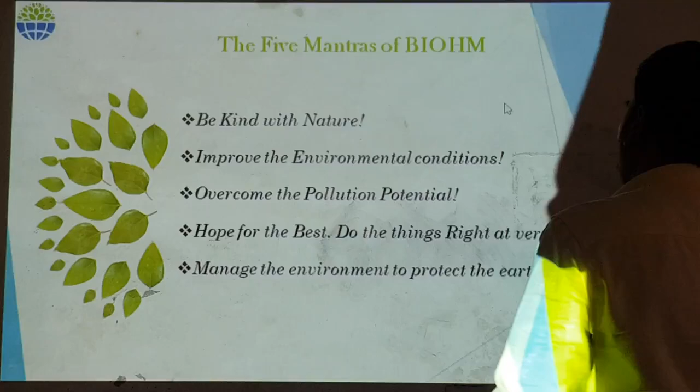So I am from Biohm Consultare, Managing Director of this company. We have started recently. Before that, I was working for another company.

Our 5 mantras of BIOHM have 5 letters. BIOHM is: Be kind with nature, Improve the environmental condition, Overcome the pollution potential, hope for the best and do the things at the very first time, and manage the environment to protect the earth. These are the 5 mantras, and that's the thought process going forward.

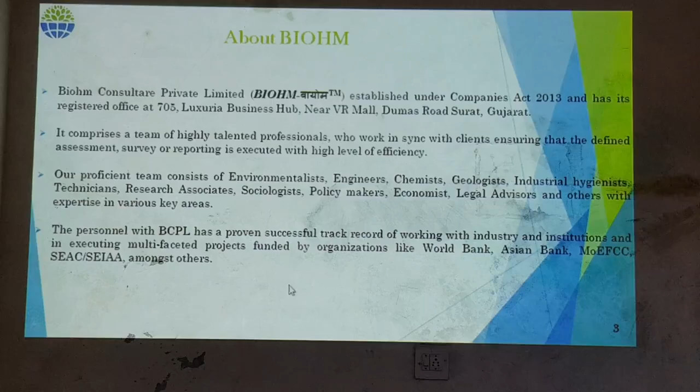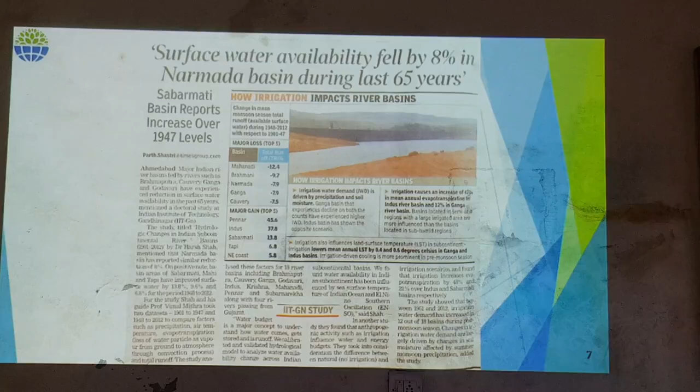Now the exact scenario that is advancing - how did this term come about? Why are we talking about water? We are concerned about the water. Reason: you can see this very recent article published in the Times of India.

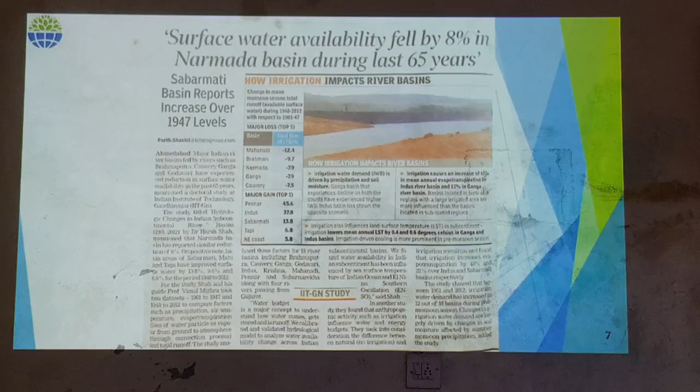Surface water availability fell by 8%. You can assume what 8% means, because that's across the whole Narmada basin during the last 65 years. That means day by day water is depleting. Why? Because this is a natural resource and we are consuming it, and not just consuming - we are polluting it, which cannot be returned again to that river or those rivers.

So in the current scenario, water is so important because we are living entities, and any living entity cannot be sustained without water, without a single drop of water.

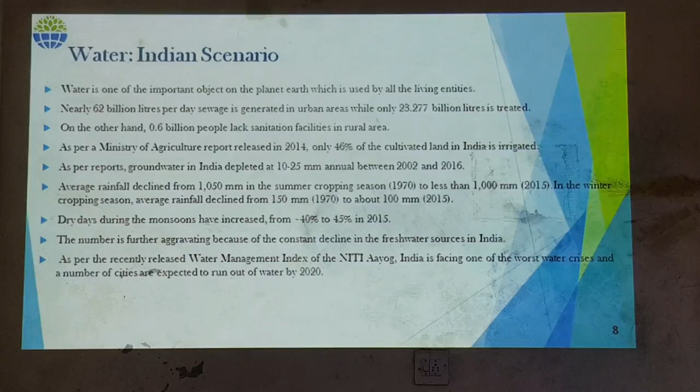You can assume all industry, even fabrication or manufacturing industry, uses water as a main prime source. In chemical manufacturing industry, they use huge amounts of water, and distillery industry is also an intensive water use industry.

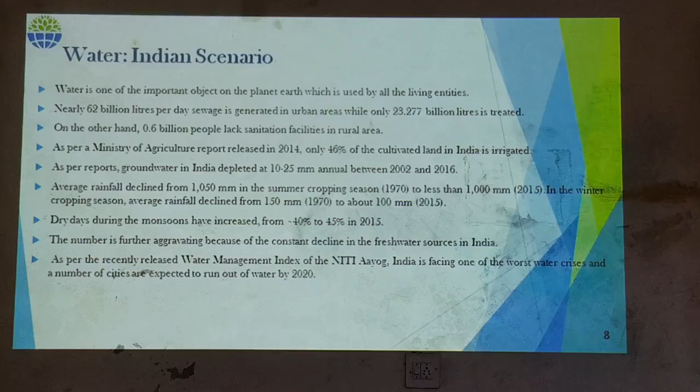So in the current scenario, nearly 62 billion liters of sewage is generated per day in India. This figure is for this whole country, and only about 23 billion liters will be treated. That means not less than 50% - we are polluting more than 50-60% of water, and that cannot be returned back.

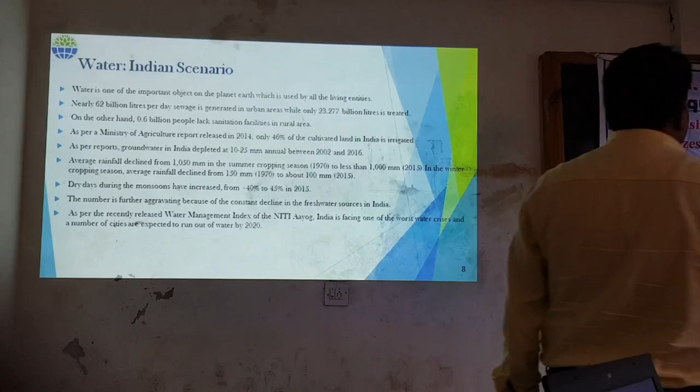Over 0.6 billion people in India lack sanitation facilities. Now Swachh Bharat toilets have been prepared and all, but till now this is the actual scenario. If you go to villages you'll see people are not using them. Even if a toilet has been built somewhere, they are not using it.

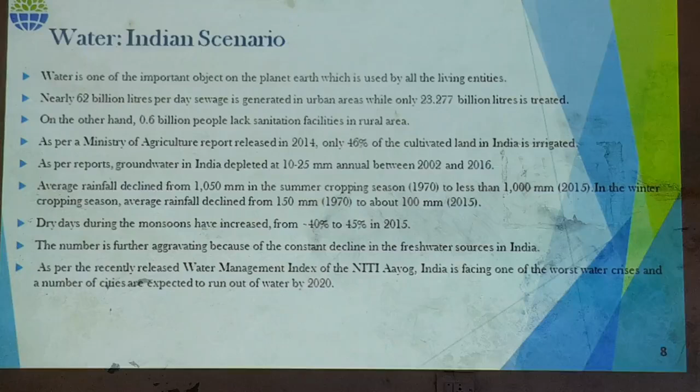As per the report, groundwater in India is depleting about 10 to 25 millimeters annually. In rainwater, in summer cropping season, it's about 1050 to 1000 mm only, and in winter the decline is from 150 to 100, meaning about 50 millimeters of rainfall has been depleted. Any rainfall that becomes a more natural resource is being utilized but not returned back.

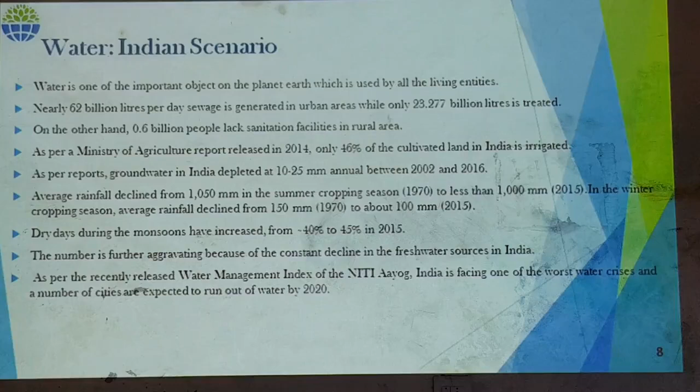So this water is polluting day by day, and the concentration - meaning the amount of water pollution - is increasing day by day. As per the recently released Water Management Index by NITI Aayog, which you can see on their website, there is a water crisis, and more cities like Delhi and others could run into crisis by 2020, which is next year only.

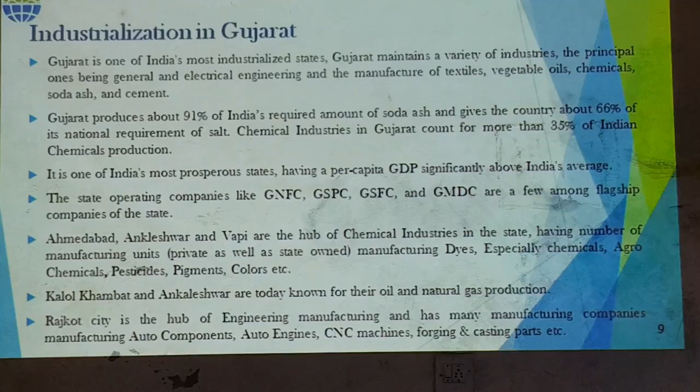That is the current scenario of water. You can assume, if suppose for one day - like you people fast, do fasting - on that day also we take water in the evening and night.

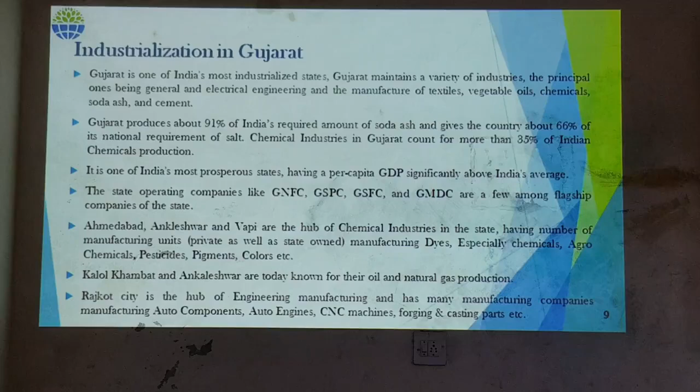Suppose for 24 hours we don't take water, what will we feel exactly? What will happen to us? Then you can imagine exactly how it is for that living entity living in the Rann of Kutch area, where rainfall doesn't even happen, and in the desert area.

So yes, industrialization of Gujarat - you can see in Ankleshwar also, a number of industries are there, and the Ankleshwar city is under critically polluted area.

Again, the CEPI index is more than 70. What is the safety index? Anyone can say about safety? CEPI - this is the pollution index released by CPCB, Central Pollution Control Board.

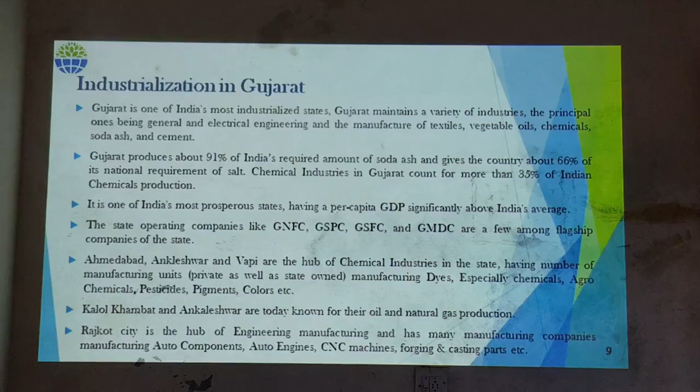Yes, New Delhi. That yearly CEPI index has been released on the basis of air only. From this year, they have included water and land pollution also.

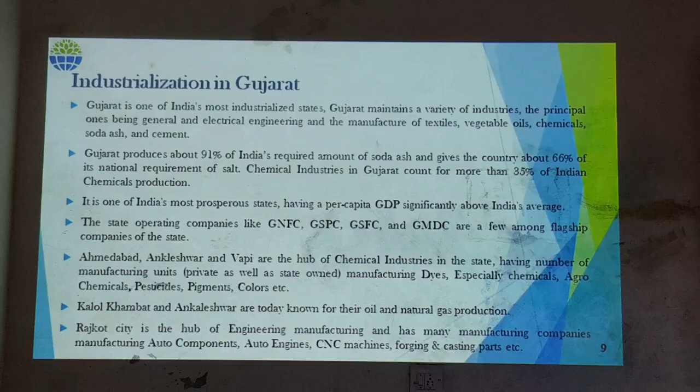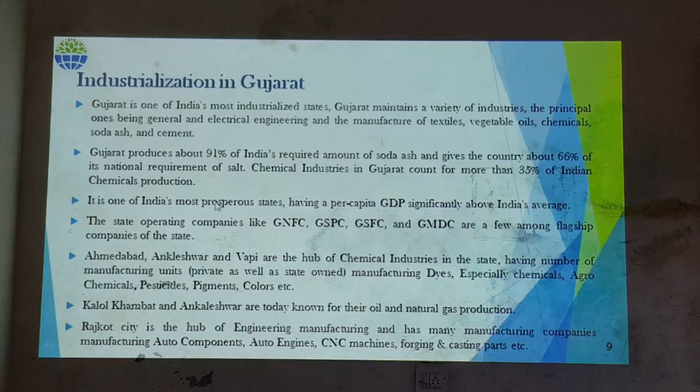So Surat has been rated more than 70, that is a critically polluted area. And now NGT has imposed a condition for 3 months - all industries should be shut down, and no new industry is to be released from the GPCB.

Status of CETP - why CETP? Because ETP is the individual treatment plant, CETP is common. In this area, Ankleshwar GIDC, and any GIDC, has a CETP - common effluent treatment plant. This common effluent treatment plant is designed for a special type, like chemical - designed only for chemical industries. So this is the scenario.

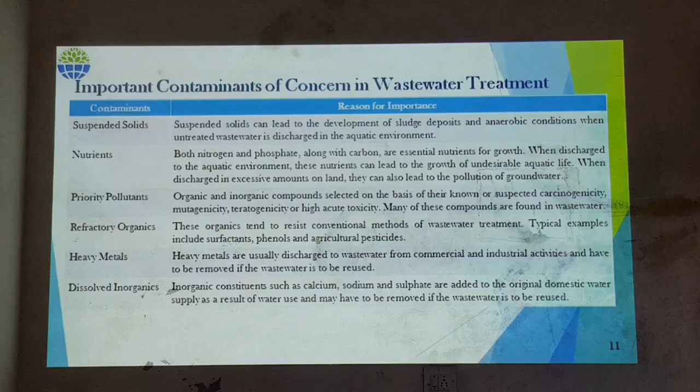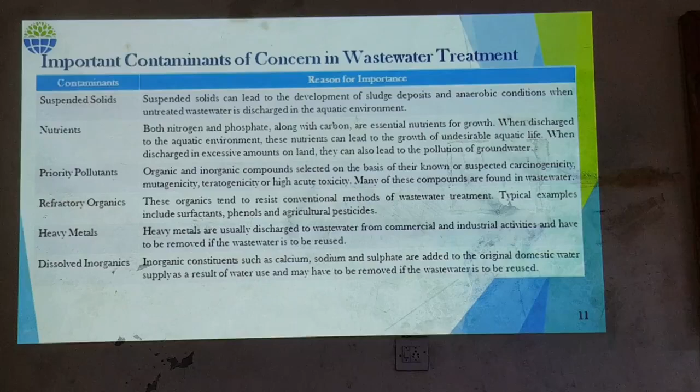So what is water pollution exactly? A simple definition is any undesirable changes in water quality. But there are some contaminants: suspended solids like TSS, some nutrients like phosphorus and nitrogen, priority pollutants, refractory organics like COD and BOD, heavy metals like chromium 6 and chromium 3 - hexavalent chromium is more dangerous - and some dissolved inorganics.

These priority pollutants include heavy metals like arsenic, which is more dangerous when found in drinking water. A case study from West Bengal: the wells there have arsenic, and people used to drink this contaminated water. Under heavy metals we have chromium, cadmium, lead, mercury, zinc and many more. Arsenic and hexavalent chromium are also toxic. So if these heavy metals are found in water, that means there is a danger for drinking.

Pesticide - we are using pesticides in agricultural crops, and these cannot be degraded. They can enter into the groundwater and contaminate it. There are also polyaromatic hydrocarbons, and PCBs.

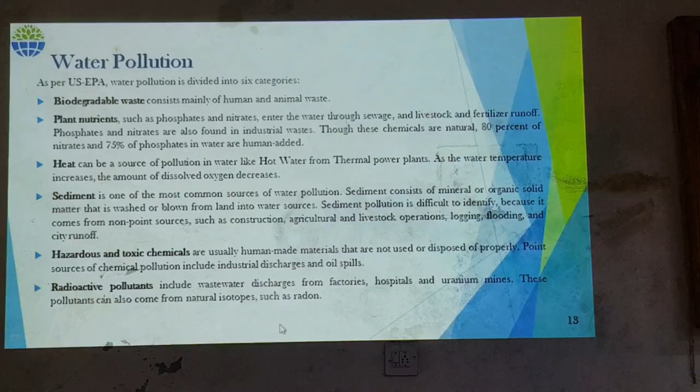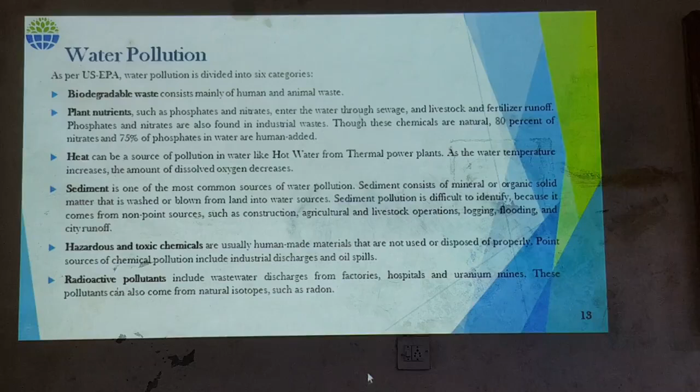As per the definition of USEPA, there are 6 attributes of water pollution. In short: biodegradable waste, plant nutrients, and one factor is heat. In case of thermal power plants, huge amounts of hot water are released into the sea or into cooling systems, and hot water means the temperature is more than ambient temperature, which can degrade the flora and fauna in that water. Other attributes are sediment, hazardous and toxic chemicals, and radioactive wastewater discharge from factories, hospitals, or uranium mines, which can also be dangerous for drinking water.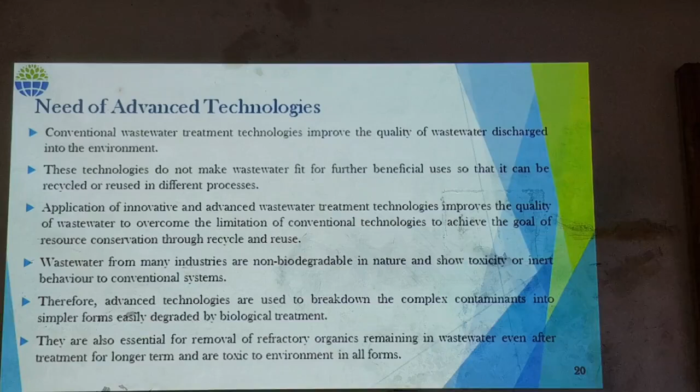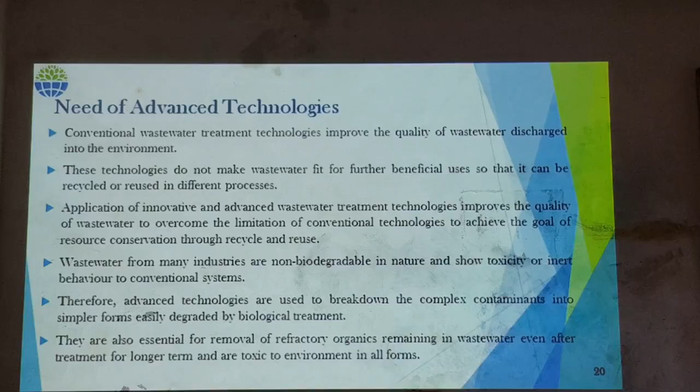Now what is the need of advanced technology? Coming to our topic of advances - for conventional technologies, we feel the operation cost is higher at site, and the quality of treated wastewater cannot be reused in many cases. In case of SBR and even MBR, these technologies do not make wastewater fit for drinking, but the treated water from conventional technology can be used in gardening or cooling towers in industries, since it still has some pollutants.

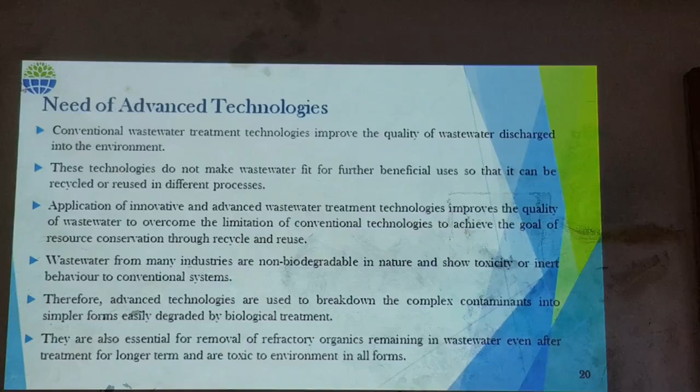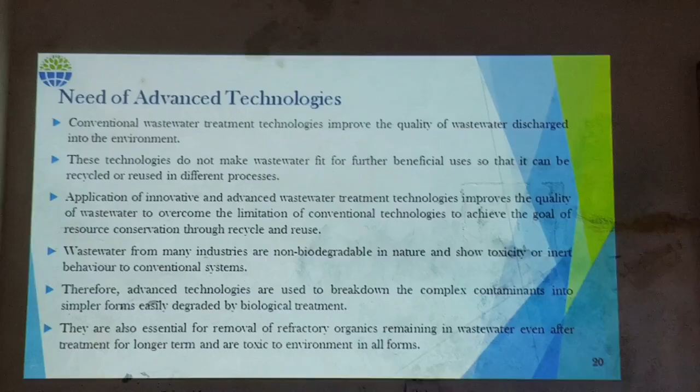So now there's a requirement for the application of innovative and cost reduction technology. Conventional technology's first drawback is that it requires a huge amount of land. Now you can see in any city, traffic is the main problem - why? Because any building does not have adequate parking inside it, since there is no land available. That means land is most important. Again, STP or any type of treatment equipment is non-productive for the industrialist.

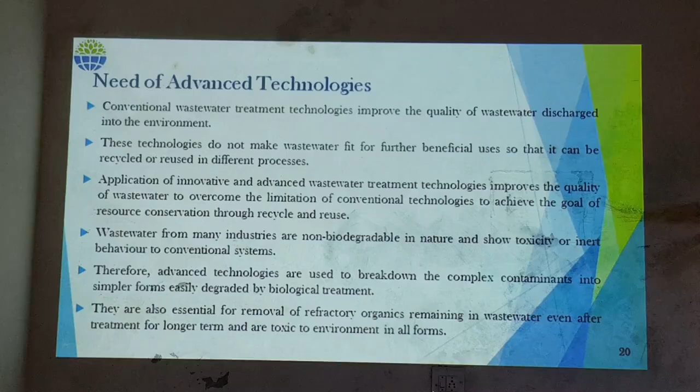Why is it non-productive? Because they don't get any money from it. Productive means any type of manufacturing or activity which generates money, but ETP doesn't give them money - that's the reason. And secondly, it consumes a lot of land, meaning conventional technology requires huge land, and land is not available for this type of setup.

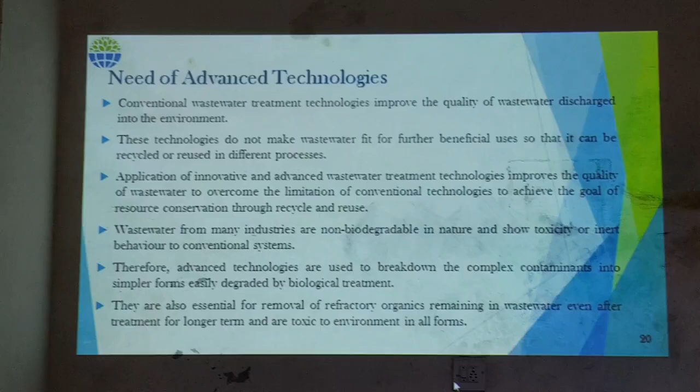So there are two major factors. One is the treated water quality is not good as per CPCB standards, and second is that they require huge land. Other advanced technologies are used to break down complex contaminants like aromatic or cyclic compounds which cannot be treated by conventional technology. So we need these advanced technologies.

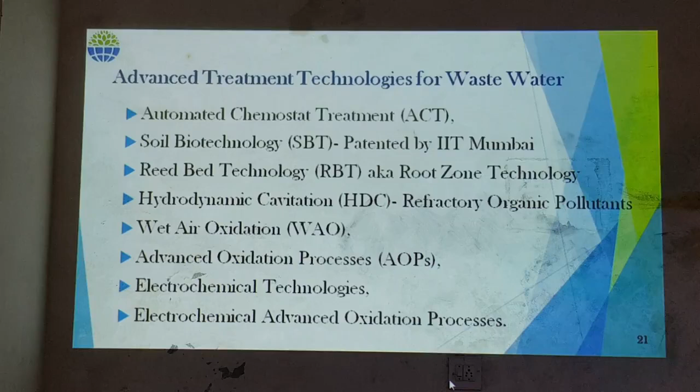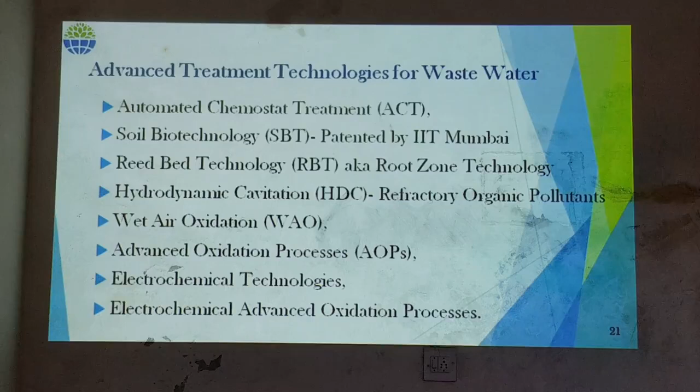So what type of technologies are there in the market? One is automated chemostat treatment, which we'll discuss later. Another is soil biotechnology, especially for STPs, sewage treatment plants, patented by IIT Bombay. Another is reed bed technology, also known as root zone technology, in which we use common reed plants, that is wetland plants, especially typha and some others. Hydrodynamic cavitation, especially for refractory organic pollutants, and wet air oxidation. Some advanced oxidation processes are there too, electrochemical technologies and electrochemical advanced oxidation process.

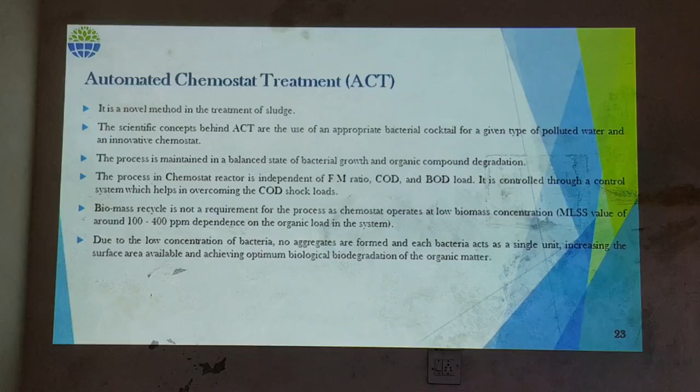Now we will discuss in detail the automated chemostat treatment technology. What is this? This is a novel technology, especially for treatment of sludge. Sludge, after treatment from any ETP or STP, we have sludge, that is semi-liquid, having more than 90% moisture and some content of organic and inorganic matter, like whatever you have treated in terms of BOD and COD, suspended solids, they can be in sludge.

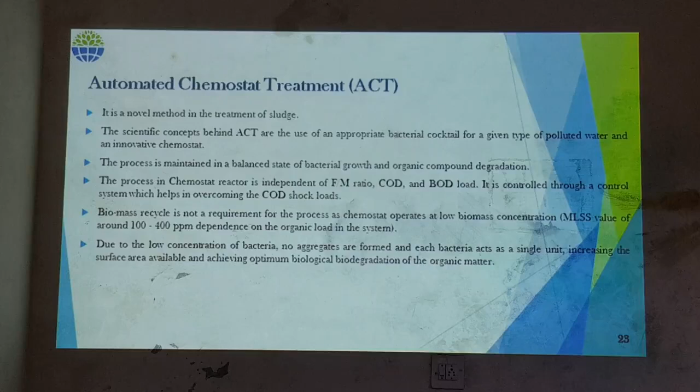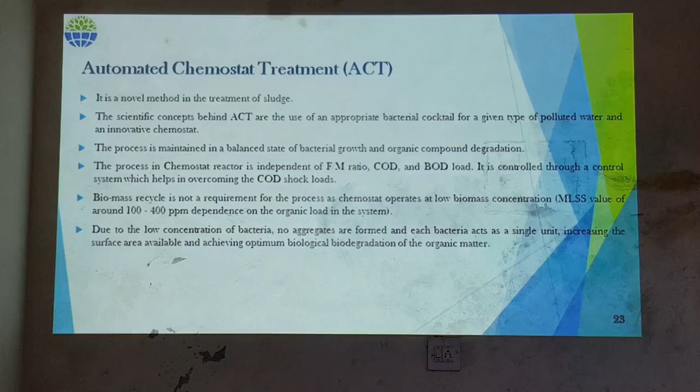So the scientific concept behind this ACT, automated chemostat treatment technology, is the use of an appropriate bacterial cocktail, because we need to treat the sludge, and sludge has organic and inorganic content, inorganic in terms of heavy metals. So we need an appropriate bacterial strain to degrade it into simpler compounds. That is known as the chemostat process. You may have studied this in some syllabus, chemostat in chemical engineering.

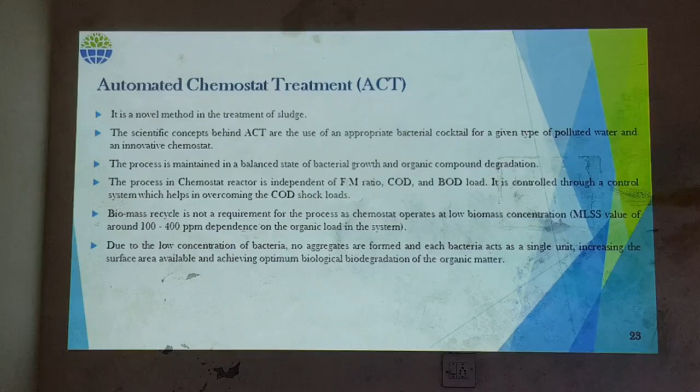The process is maintained in a balanced state of bacterial growth. When we introduce bacteria into any type of media, they have to grow and multiply within 24 hours, doubling. Any bacteria, E. coli or something, they will have fast reproduction within 24 hours, and they have a progressive logarithmic phase.

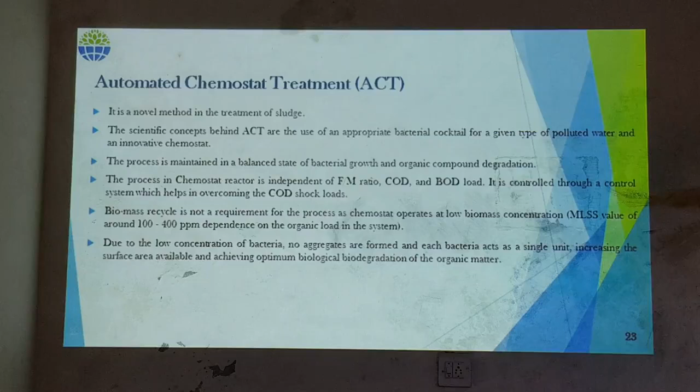The process in the chemostat reactor is independent of the F/M ratio, COD and BOD load also, and this can be controlled through an automated control system, which helps in overcoming COD shocks, because COD controls the system, so we have to control before COD shocks occur. Biomass recycle is not required for this chemostat process, because it operates at low biomass concentration, that is MLSS, which is around 100 to 400 ppm, depending on the organic load of the sludge.

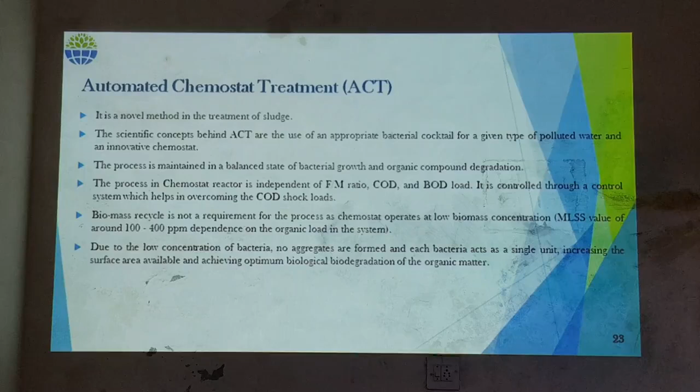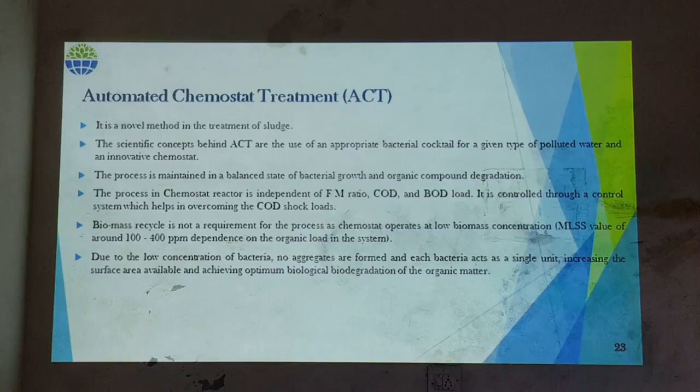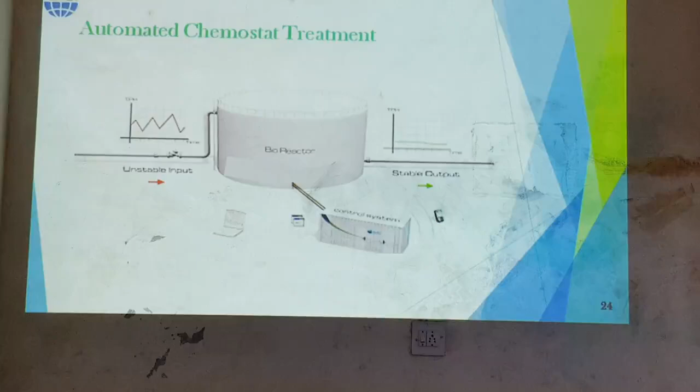The input, after ETP or STP, that is sludge, goes into the bioreactor, and the bioreactor has a specific bacterial strain designed for degradation of that specific type of sludge. Why? Because we need to degrade those compounds. So before filling the sludge into the bioreactor, we characterize the sludge, how much inorganic, how much organic, and which type of organic matter is inside the sludge. As per that characteristic, we have to choose the bacterial strain, not design it exactly, because in the market the bacterial strains are already available based on characteristics. So we choose the bacterial strain and then maintain the chemostat process.

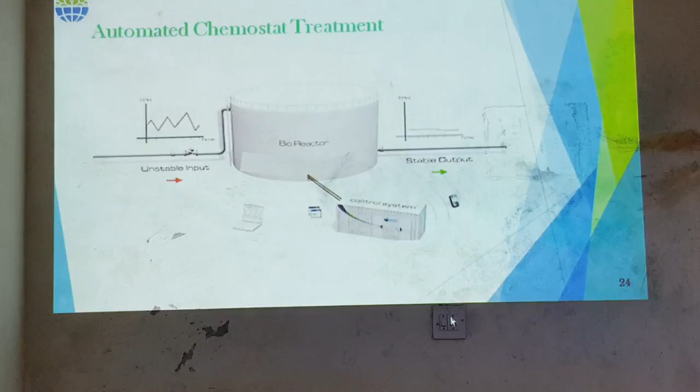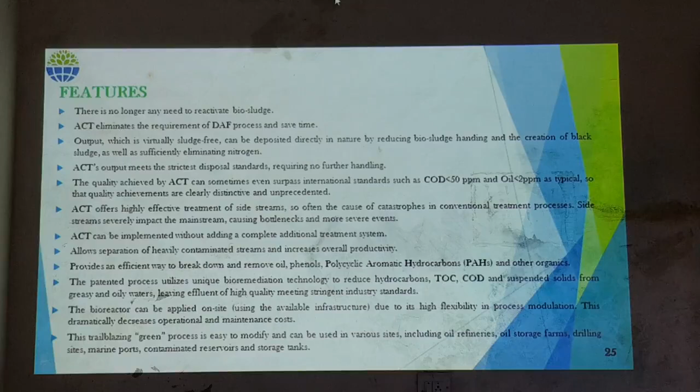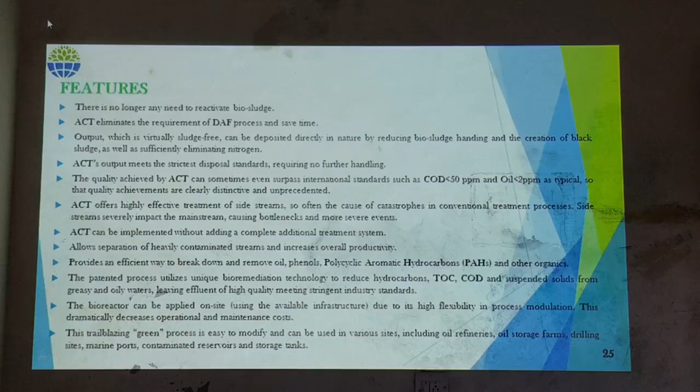The output sludge can be deposited directly in nature by reducing biosludge handling and creation of black sludge. This technology's output meets the standards of CPCB, GPCB and even WHO. And this offers highly effective treatment of side streams, also implemented without adding additional treatment technology.

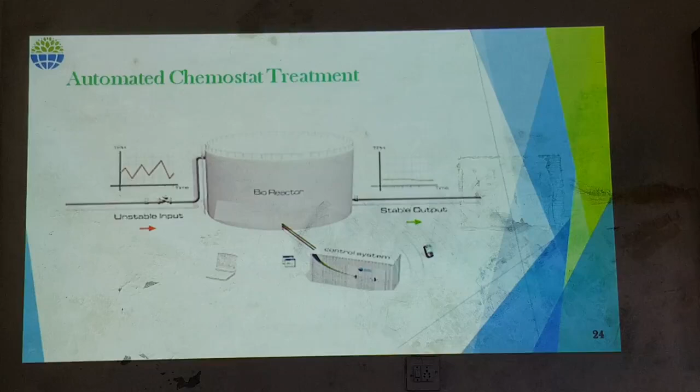As you can see in the previous slide, this design is very simple. We need to add the sludge into the bioreactor, and we have chosen one bacterial strain as per the characteristic of the sludge. We add it into the bioreactor, and then we need to control only two things: one is pH and another is temperature. Why temperature? Because after the reproduction of the bacteria like E. coli, temperature will increase, so we have to control or set it at the optimum temperature required for bacterial growth in the logarithmic phase.

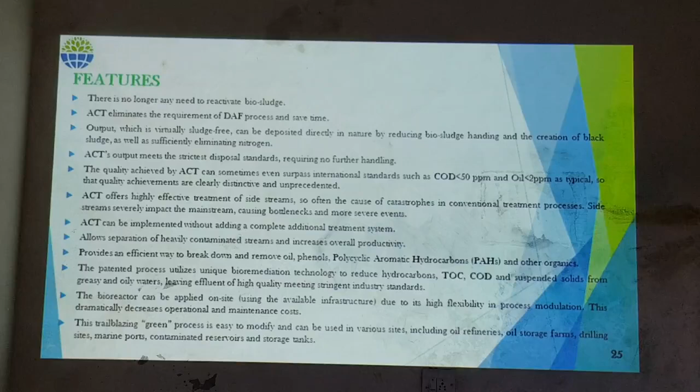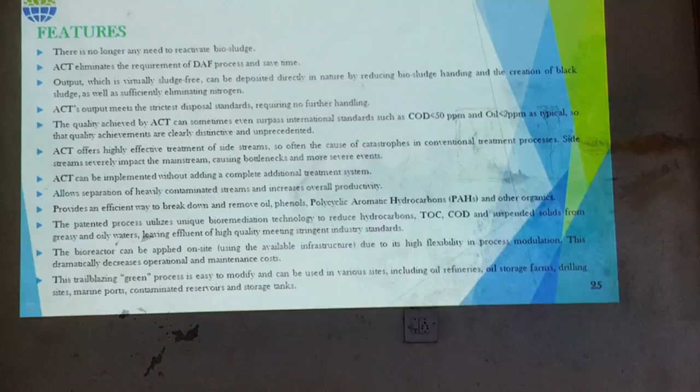The bioreactor can be applied on site. It's very simple and small in design, so you can take it to the site with high flexibility in modulation. This is a green process which we can modify as per requirement, like for oil refineries, oil storage farms, oil drilling, marine ports, and contaminated reservoir storage tanks. This chemostat process can be utilized especially in oil treating, oil refineries, and oil industries because bacterial applications are there, so they can remove heavy metals and oil contaminants from the sludge.

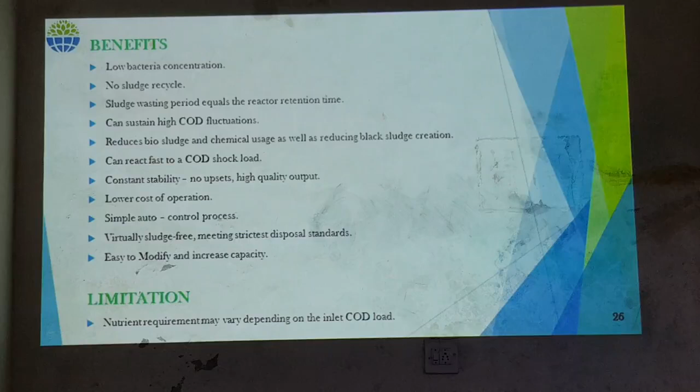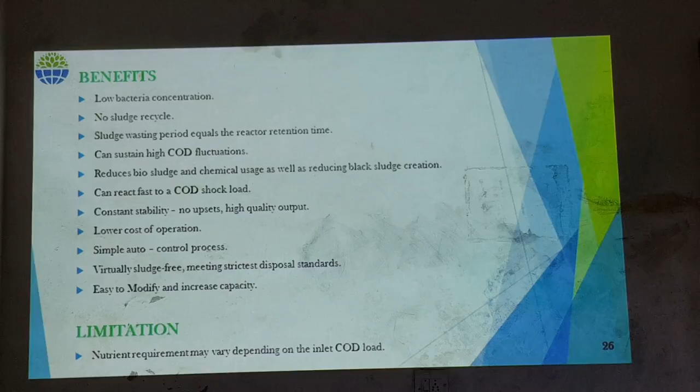So what are the benefits of this chemostat technology? One is low cost, low bacterial concentration, and no recycling is required of that sludge. Sludge wasting period equals the bioreactor retention time, so we can equalize all those, meaning we don't have to wait for the treatment. This can be sustained, and any type of COD fluctuation from 4,000 to 40,000 can be handled.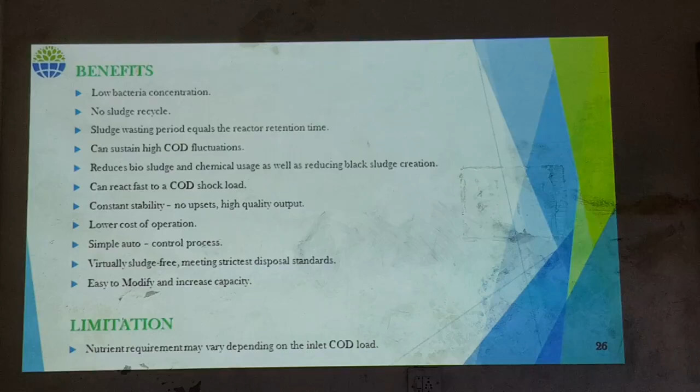This can react fast because multiplication takes only 24 hours, with lower cost operation and a simple automated control system as per design. You can get virtually sludge-free output, meeting all disposal standards, and it's easy to modify. The limitation is that it depends on the COD load, so we have to control the COD load.

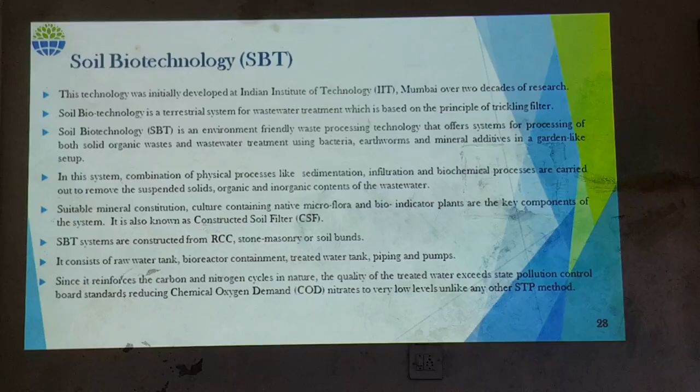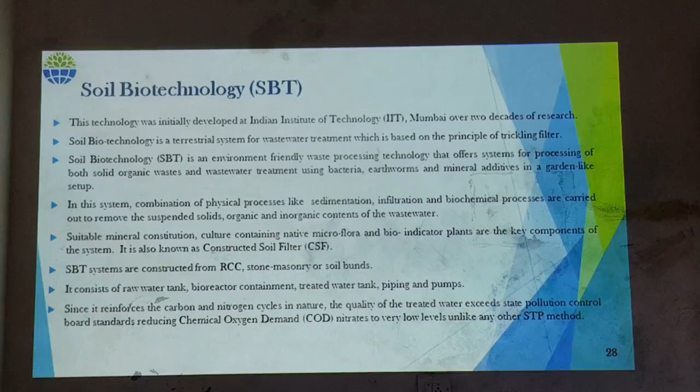Now we'll discuss soil biotechnology. This technology is patented by IIT Bombay and named SBT because the media is soil and bacteria. After 20 years of research at IIT Bombay, they have patented this technology, and it's very good, but has some limitations, as all conventional technologies do.

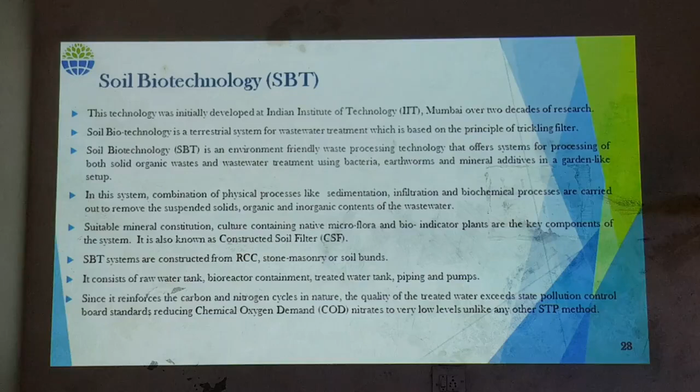This has some limitations because it requires a huge land area. Soil biotechnology ensures, and also controls odor nuisance first in case of STP, using bacteria, earthworms, and mineral additives like a garden setup. In this system, a combination of physical processes like sedimentation, infiltration, and biochemical processes are carried out to remove suspended solids, organic and inorganic contaminants from the sewage. This is suitable for mineral constitution.

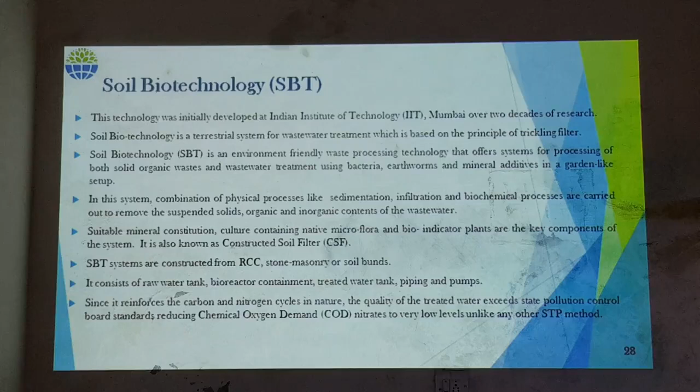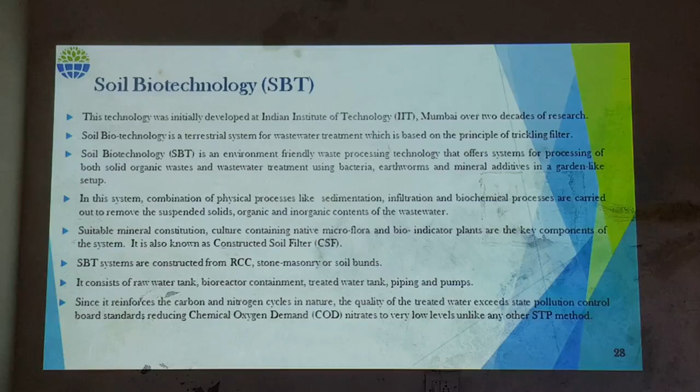Microflora and bio-indicator plants are the key components of this, and it's also known as CSF, constructed soil filter, which is a natural soil filter. This system is constructed in RCC, masonry, or soil bunds, and consists of a raw water tank, bioreactor containment, treated water tank, piping and pumps. This enforces the carbon and nitrogen cycle in nature. So the quality of treated water exceeds state pollution control board standards, reducing COD and BOD, and can be used for gardening or other purposes like flushing, even bathing.

This water treated from SBT technology can be used for bathing purposes also. Except for drinking, this water can be used anywhere.

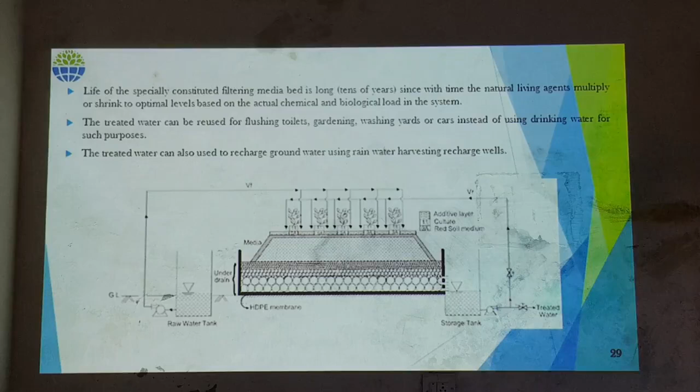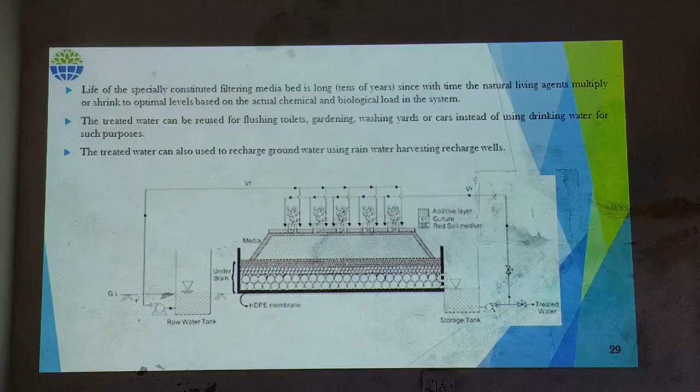Here is the representation of SBT, how we can design it. The life of the specially constituted filtering media, like the soil bed, is long since natural living agents multiply or shrink to the optimal level based on the actual chemical and biological load. So treated water can be used in gardening, washing yards, and industry—except for drinking, we can use it anywhere. NDMC Delhi is using this water after treatment from this technology. We have installed 12 STPs in the Delhi area, including Lodi Garden, to treat sewage, and they are taking the water back for gardening and other flushing purposes.

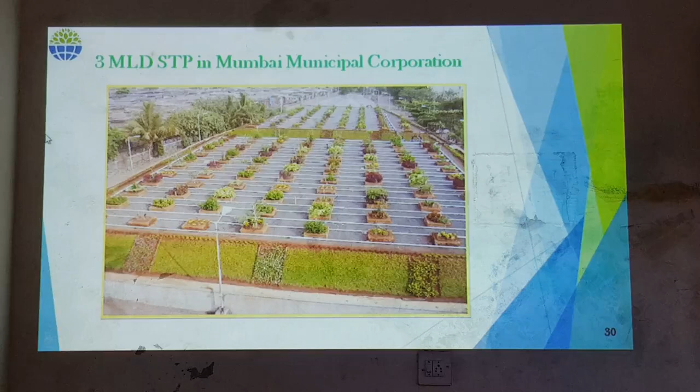Next, one picture from Mumbai Municipal Corporation. You can see this, you cannot imagine there is an STP working here because this is just the outlet. You can see there is no open area; the whole system is closed, and on the upper side you can see only the plants. This is the STP, SBT based, because soil is the media itself.

There are 3 layers of media—concrete, then soil and bacteria, earthworms—that's the natural system. This filters the water, and then we can reuse it without using ACF or PSF or any other type of filter. ACF means activated carbon filter, and PSF means pressure sand filter—meaning any type of filtration is naturally happening here.

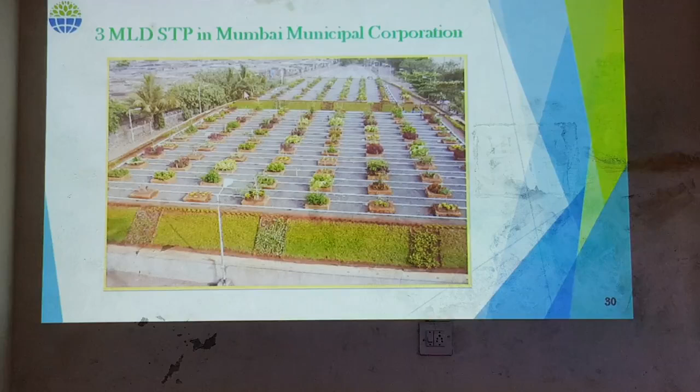So we have designed, IIT Bombay has designed, this type of appealing garden, a simple garden. We cannot tell by first impression that it's a working STP, and there is no odor nuisance.

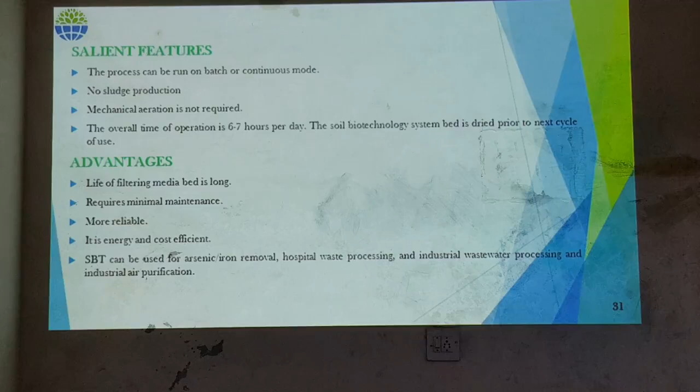The most important feature is that there is no sludge. Why? Because the soil media itself—sludge gets deposited in that soil only, and after 20-30 years we can remove that soil and use it as manure or fertilizer.

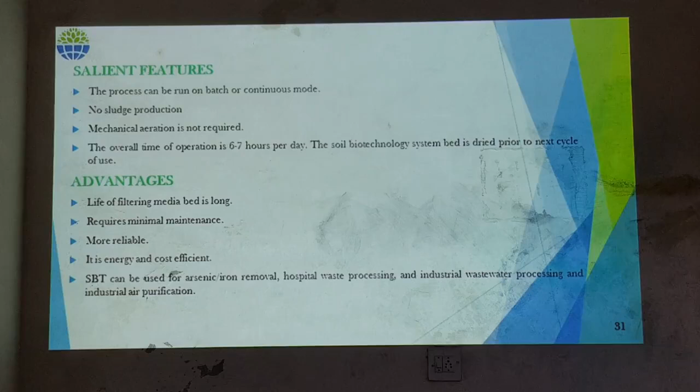This is a continuous mode system. We can make it batch also, but optimum working is continuous, 24 hours. Mechanical aeration is not required—no mechanical agitation, aeration, nothing. Overall time is about 6 to 7 hours to complete one cycle, and then this water is recycled again. The advantage is the life of the filtering media is very long, more than 10 years.